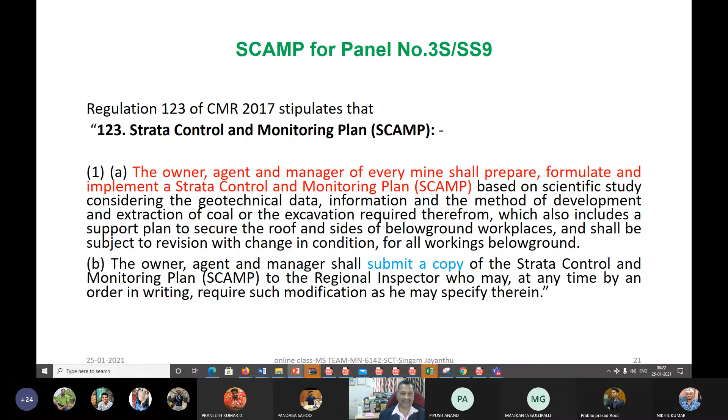We started discussing the previous topic on Strata Control and Monitoring Plan and its related latest issues of regulations 2017, which is 123 regulation. Those details are available everywhere, on Google. Some important points we tried to discuss in the previous classes, along with some case studies.

Now we are going ahead with a case study of a typical mine and its support designs, and then rock mass classifications - not only rock mass rating, but also rock mass quality. Today we will be discussing mostly on all these aspects.

Those who have prior knowledge from previous courses, as I gave emphasis on the total system, can also share their knowledge with others in our group, because we have a very good transdisciplinary group from civil engineering, mechanical engineering, maybe electrical, electronics, and so on. That's what we promote: transdisciplinary, translational, industry-oriented research, especially for Strata Control Technology, because only mining engineers cannot do the total research on that.

We need transdisciplinary research teams as part of National Educational Policy 2020. Now I kept the numbers as is, based on some draft report I have been preparing, so it is easy for anyone interested to learn more. They can also get a lot of data from the mines, and I can introduce the mine people, who will know what happened during the night shift, depending on their interest, from this KTK-5 mine.

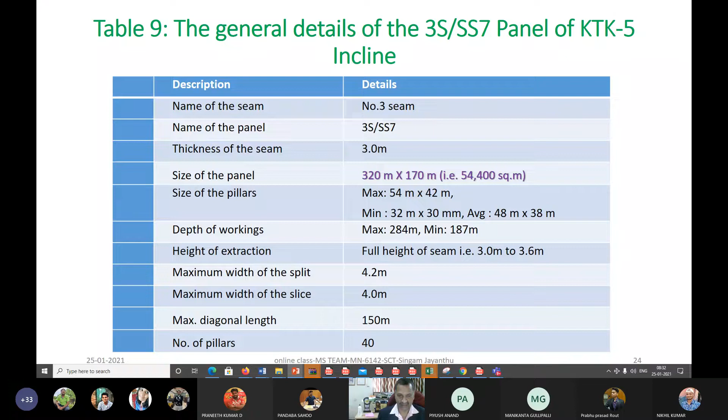These are some typical issues that my beloved students, as civil engineers, can understand better, and as mechanical engineers too. It is easy to estimate the deflection when there is more length and its moment of inertia, and based on its Young's modulus, modulus of rigidity - M by I is equal to F by Y is equal to E by R. That equation holds good, but it is not truly 100% right for our rock mechanics or rock masses. That may be very good for solid mechanics, which our mechanical engineers like Nikhil and others must be using.

Since we are using this for our support designs, rock mass rating and rock mass quality, I wanted to give a little time, because I don't want to explain the total methods of mining in this course or class. Of course, if somebody is interested, I can take you into the mines either through videos, photographs, or introduce you to the last night shift under manager of that mine to tell what happened there - depending on your interest, my beloved students.

So the method of extraction, as we have seen, is 4.2 meter wide and 3 meter height. That's what - each pillar is divided into 2 equal halves, and later in the apparent dip.

This is a simple point: when the inclination is more, instead of going into the direct dip direction or main dip direction, you will be having apparent dip. This apparent dip must be compared to the main dip. It is dipping like this, for example, here in this mine 1 in 2.5 or something like that. But when you have all those seams dipping like this, when you have a gallery along the strike, that is 0 degree dipping - it is a straight line, this is horizontal. When you have some apparent dip, that will have less gradient, which will facilitate our machinery and other things to move. That's why we follow apparent dip.

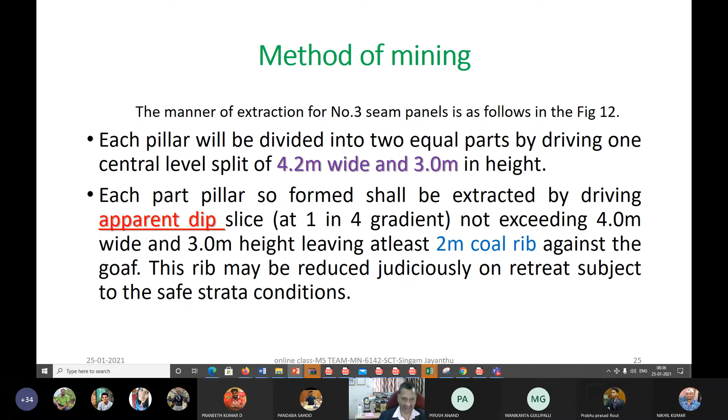About 3 meter along the floor level, when we extract during development, on retreat while coming return, that is when slices are made. So during that time, it can be heightened near the goaf. This is the way how it is extracted.

Either it can be done, if it is developed along the roof level, then it can be done by dinting it. When it is developed along the floor level, then it can be done by roof blasting. This is the way how we do it.

If the development is done in the roof level, then along the floor, that 0.6 meter coal will be there, that you will be extracting. But this dinting is more easy and more comfortable as far as strata control technology is concerned, because the reason is very simple, my beloved students of strata control technology, MN 6142.

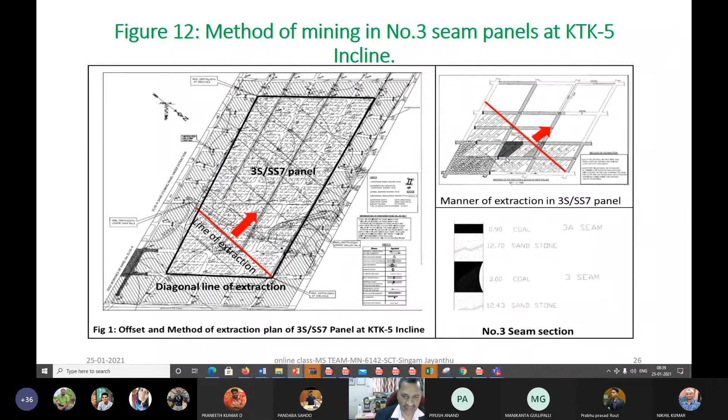These slices are made so that compared to this, the angle will be less in the apparent dip direction, as far as the workings are concerned, for maneuverability of your machines, LHD, SDL, like that. Here SDLs are used, and I am not going much into the method here, but later.

Generally when it is done, as far as this case study is concerned, it is supposed to protect the surface feature. That is also one part of your strata control technology that you are supposed to consider in designing any mining methods or strata control measures, because there is a surface to be protected with some state highways.

And high tension power lines. Okay, then driving off a new slice, of course, this is about the method, and later they used to stow it, right? And then at any time there should not be more than 2 slice voids left unstowed, because these examples.

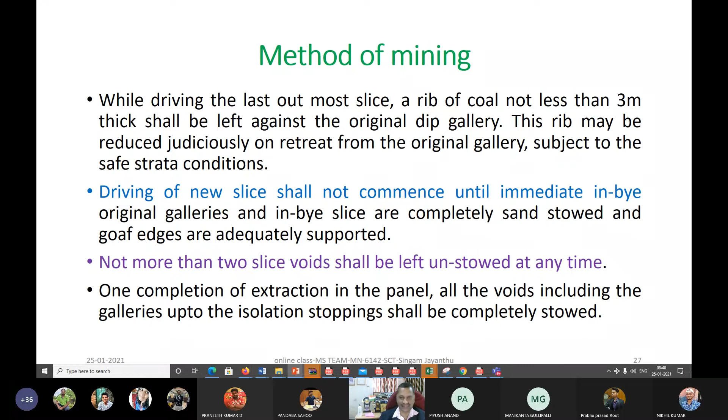These details I used to explain to my beloved students many times, where we have seen caving in a stowing panel, like I used to give some example of notorious examples when we used to conduct investigations in one of the typical Amlabad colliery, because these names I give, so that whenever you have time to see somewhere when you write, because this was a part of our CMRS investigations in 1989.

Right, '89, '90, you can say reports like that by our beloved friends Angad Kushwaha, Raghavendra Singh, Rajendra Singh, because these are the people with whom we used to go daily and then do that work, and under the leadership of our Dr. T.N. Singh Saab, with us for about 10 years, we were doing that. So these are the references. You can simply write their names, then you will get a lot of information. That is the reason why I give these names also, my beloved students of strata control technology.

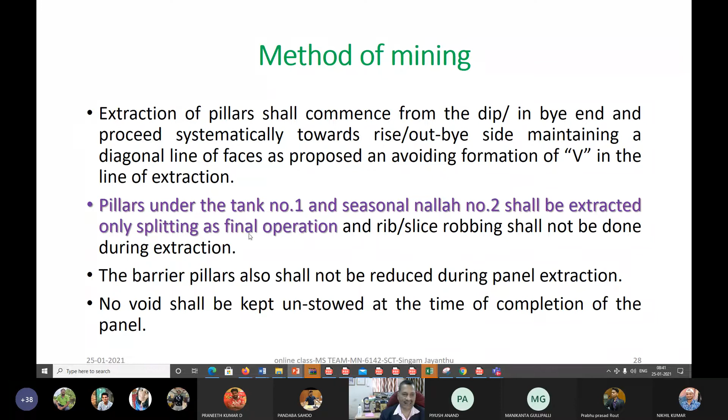Now, as a part of this method, there may be some seasonal nalas or so many things. That's why we are supposed to leave some protection pillars also somewhere. And this is our important point here.

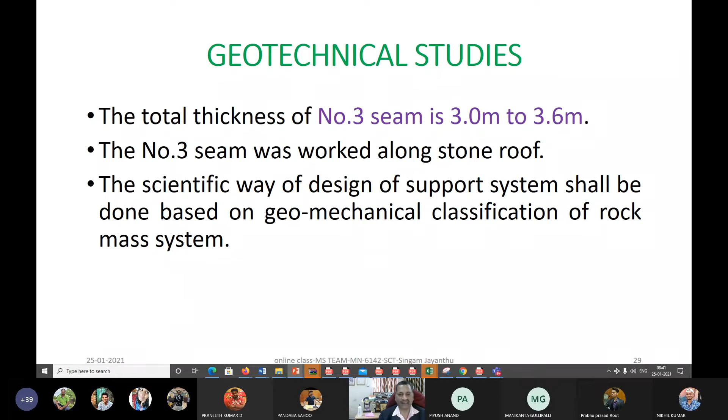These are the people involved in some of our investigations with international collaboration. So depending on your interest, I will discuss more and more, as I used to see an excellent interest by our Nikhil and group in learning more. That is more important, and I appreciate that. Once again, Nikhil, are you there, Nikhil?

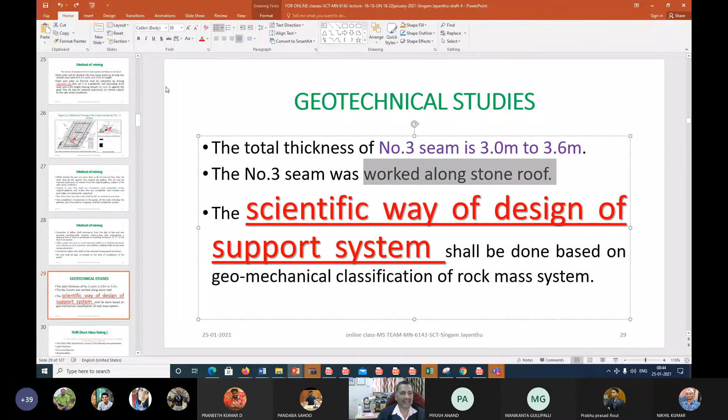This is very important, because if it had been worked along the floor, then there would have been 0.3 meters, or 0.6 meter might have been coal, and in the rock mass rating you might have attempted with 0.6 meter of coal in addition to 1.4 meter in the nether roof or immediate roof. That stone would have become your rock mass rating parameter, your classification to consider. But since this is a point, I kept it in blue color. You like it, right? I like it.

Okay, we all like it. Worked along the stone roof, so this will be the stone in the immediate roof, and for that you should design the support system. There is a scientific way of designing, and this will be done based on geomechanical classification, as you know very well. These classifications are your RMR as well as your Q. Both are used here, and why both are required?

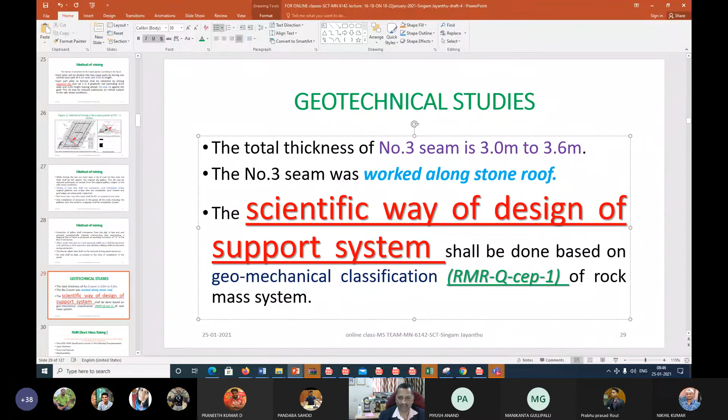Now this is a CEP question I am telling you: can't we have only one and do your business? But it is not sufficient, at least at the present level. You consider this as a CEP question, and I will be discussing based on your responses, my beloved students, why this rock mass rating and Q both are required. So here I think I should put this as a CEP question.

I will be writing here, CEP question 1: Why RMR and Q both are required for support design. So this is your CEP question, I have made it very clear to you. Now you think over it and we will be discussing, right? This is your CEP question, in red color, bold, underline, whatever you like. Okay, this is your CEP question.

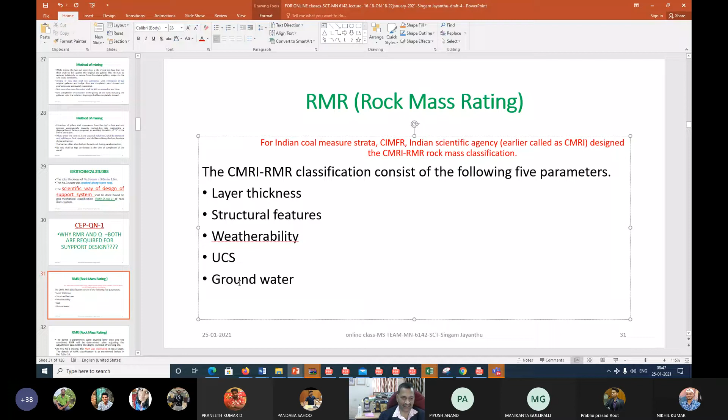Meanwhile, now we are going further. Here, rock mass rating - this we already discussed, so the parameters I am not going to explain further. We covered layer thickness, structural features, weatherability, compressive strength, uniaxial compressive strength, and groundwater. Here also, in this rating, we look at these 5 parameters.

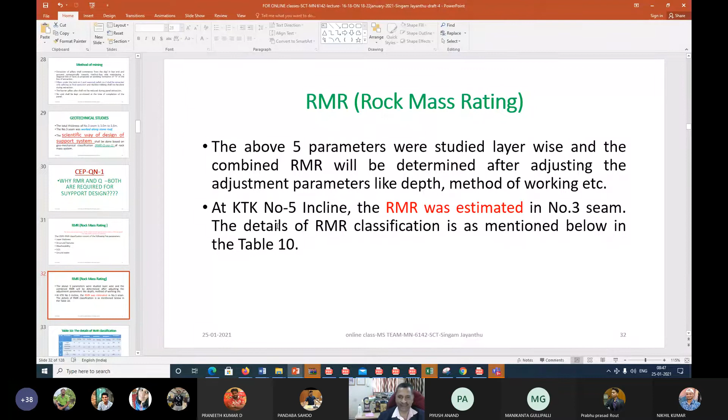This is from a typical mine, you need not consider the name as far as understanding the subject is concerned. Just leave out the name of the mine. In this typical mine, try to understand how this is estimated - the procedure we already discussed, so I am not going into that again.

Here are the details of this classification. That's why I kept this numbering - since I have been preparing this investigation report, I kept the same numbers so this becomes a reference for me and for anybody interested to learn and contribute to the present problems of our mining industry, as part of Atmanirbhar Bharat or Make in India, Skill India - like our Nikhil and others, they are coming up nicely.

Now here there are different layers, as you have seen - sandstone layer and another layer, another layer, another layer, where there is a value: 6 centimeter, 15 centimeter, 23 centimeter, 53, then 103. So around 1 meter overlying, its rating is 30, as far as layer thickness is concerned.

This itself shows, my beloved students, it is very simple to understand why it is 30 - the maximum rating given to that is 30. That means this is not having many layers in between, or there are no significant layers in between. That's why the full rating is given. That is the meaning as far as layer thickness is concerned.

And when you see it that way, here the layer thickness rating given is only 28. It has a similar analogy - you can understand why it is given less or more, as we have seen some examples already. I hope I showed you, otherwise you will get plenty of examples. Compared to other layers, you can easily understand there are very thin layers in the immediate one - that's why the rating of 11 is given, very less.

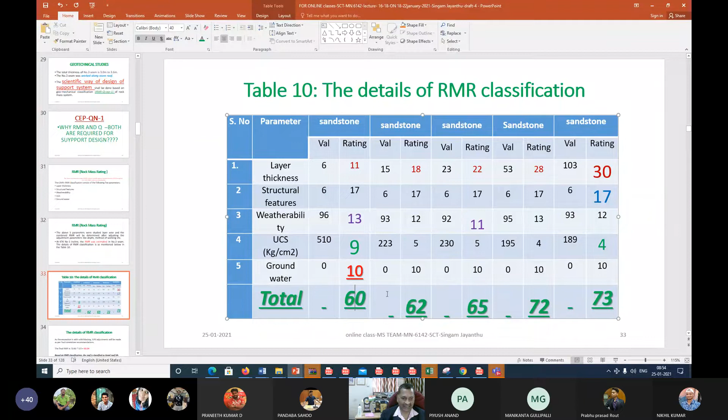So in that case, now you can see for the first layer, these are the total RMR for each and every layer. This is a very important point, my beloved students, to understand. Total is 60 for the first layer, for the second layer 62, for the third layer 65, for the fourth layer 72, and fifth layer 73. Now from there, we should go to the next step where you are designing the support.

And now you are supposed to do the adjustment of this rock mass rating, as discussed in the previous classes. If you have any doubts, definitely we will discuss.

Don't worry. I wish that before going to Republic Day, the day where we should feel more liberty to understand the issues, you should be liberal, right? You should not feel shy even asking any questions. That type of liberty you are having. On this Republic Day, all this knowledge should flow like river water. Those who are interested, like our Nikhil and others, who are very sincerely doing wonderful work on this transdisciplinary research, besides our mining and other BTech students, I appreciate them once again on this Republic Day in advance, that they are utilizing and making this knowledge available with improved skill India, useful for Make in India Atmanirbhar Bharat, of our President of CSIR, none other than Narendra Modi sir. These are very much required as a part of National Education Policy 2020, my beloved students.

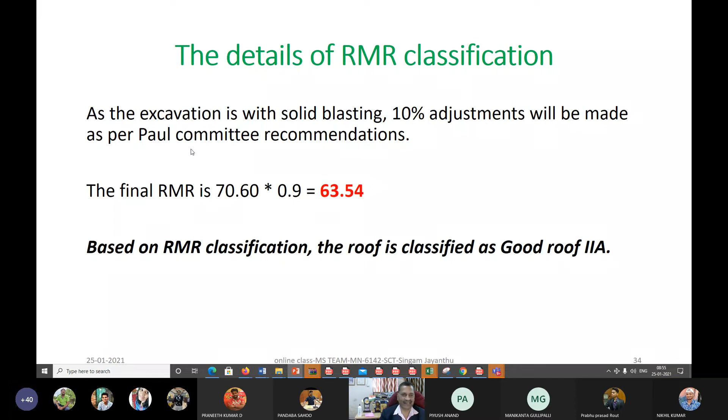As the excavation is with solid blasting, now you have to do the adjustments. Here we did a 10% adjustment, as per the Paul Committee recommendations, already told you at that time. So this was not very new, this is old wine in a new bottle, old juice in a new bottle, since 1988, as I used to tell you, my beloved students. Since 1988, we have been doing a lot of things, and more modifications are required. Those other issues definitely we'll be discussing.

But with these modifications, considering the condition that excavation is with solid blasting, now we have to reduce from the final RMR. How final RMR is reached, I need not explain, that is a weighted average of that thickness and RMR. And then it is reduced by 0.9, that is 10% reduction. So this rock mass rating will be 63.54. This is based on rock mass rating classification. The roof is classified as a good roof condition, 2A, as far as that thing is concerned.

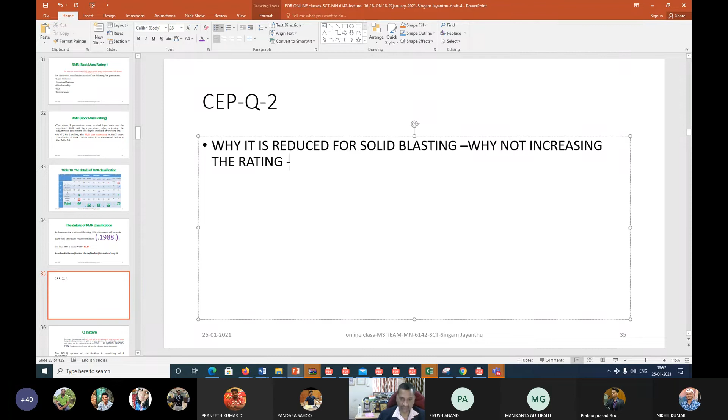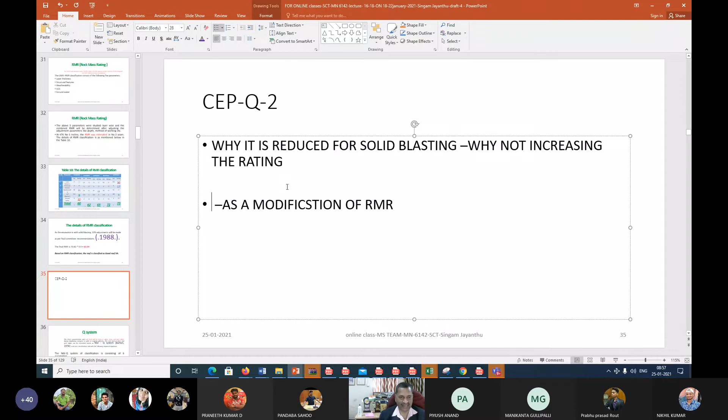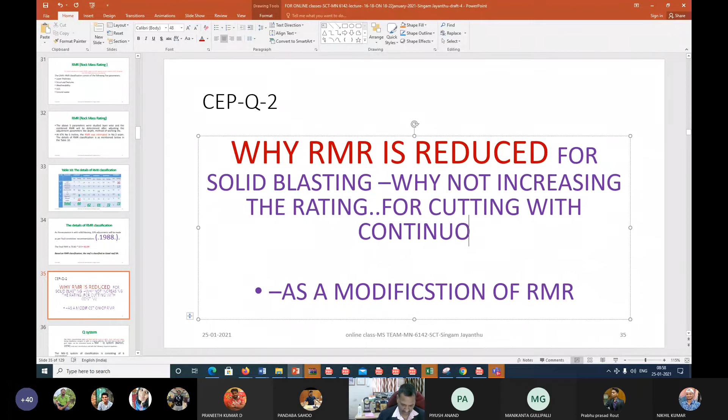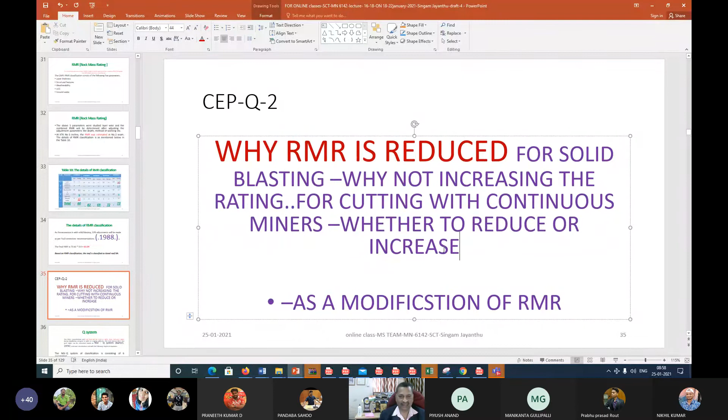But here now a very good CEP question for you, I hope you will really enjoy it. Why is it reduced for solid blasting? Why not increasing the rating as a modification of RMR? This is simple to understand, but we have already discussed many times, that's why I wish that even if it is not discussed before, it is easy for you to tell. So why is RMR reduced for solid blasting? For solid blasting, shall I reduce or increase, and if so, why? And it is not only that, for cutting with continuous miners, whether to reduce or increase?

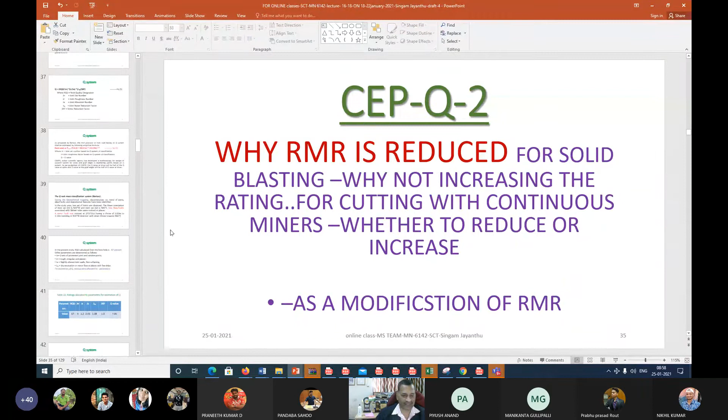So now continuing for my beloved students, this is a Q system that we want to go further, and other few details we have seen at that time based on the rock mass rating. Now we will be converting that into the load coming, and then to suit that load, how many number of supports, roof bolts, or whatever the support design. So once again I can show you, but already we discussed before, that's why I'm not discussing now, and I'm jumping into the rock mass classification Q system here.

So here, basically, you see stress concentration and rock load will generally be more as compared to your development workings. The development workings means, suppose this is a total panel with dips and rises, all the galleries like this, and that's why you made the pillars. This is an equal distribution of the stresses on the sides of the pillar. Some of the load is being taken by the pillars, right? But that is at the stage of development, that's why only rock mass rating is limited to that.

And already I told you, one of my beloved colleagues, scientists Angad Kushwaha, Raghavendra, Rajendra, all those people with whom we were working, they tried to even modify this rock mass rating, as I told you, and all the materials already I have given to you as part of the course material in the beginning of our semester. You must have gone through that. There also they tried to modify, including something more, some stress conditions based on the stress ratio of horizontal stress to vertical stress ratio and all those things. But still, I cannot say it can be widely applicable unless this comes as a part of any regulation or circular for the depillering design of support.

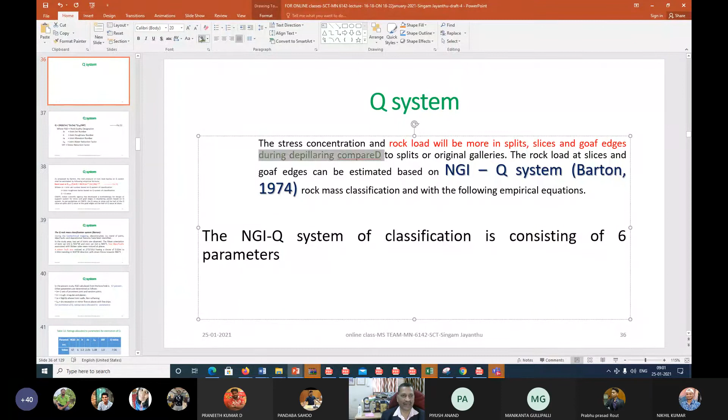Till that time, it will be more generally on the split slices and goaf edges during depillering compared to your development, as I tried to show you. That is the reason why now we are going a little bit further with some more details of this.

That is the reason why the rock load at slices and goaf edges can be estimated based on NGI Q system. Since long time, our beloved friend Nick Barton, Dr. Barton from Norway, in 1974, he started doing a lot of work on this too, but basically his work was limited to the tunnel supports with different geomechanic conditions, different stress regimes, stress situations of those tunnels, whether it is very deep or shallow, very hard rocks or soft rocks, squeezing ground conditions, and all those things were considered. So that's what he considered, these 6 parameters.

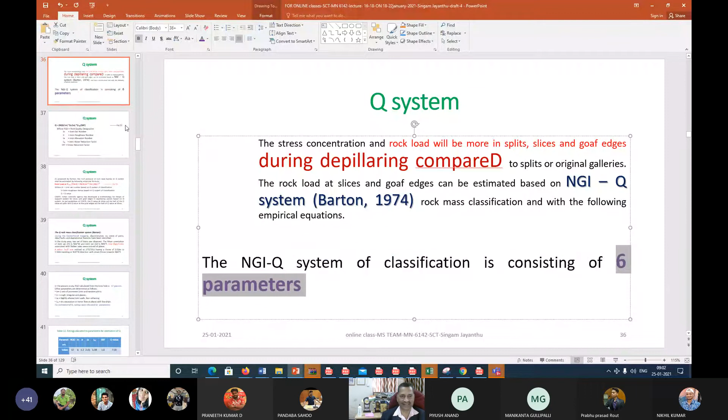The 6 parameters were considered as part of that classification. Of course, those details we will discuss later, but here these 6 parameters, you can see how this is, my beloved student, you should note down very clearly that this is all based on empirical formulations and trying to understand the physical situation. And nowadays, we are going with more applications of artificial intelligence, machine learning, artificial neural network, deep learning, algorithms, and so many things to analyze the data.

First is to generate the data through different types of investigations. That is a part you understand, and all those things we are supposed to give a lot of importance to. That's why I encourage you, my beloved next generation students, whether they are from any branch of engineering, biomedical, electrical, mechanical, or civil, they can give a lot of importance to understanding the field condition and then implementing, or after understanding that problem, only then can you think of its solution properly.

Otherwise, without understanding, it is something like castles in the air, like Vishwamitra built a Trishanku Swargam. It should not be like that, right? It should be the real situation that you should understand. That's why I give a lot of importance.

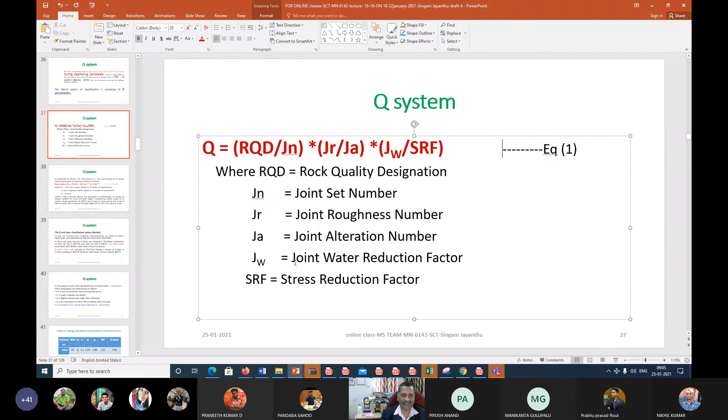This is very, very important. Before Republic Day, I am telling you, my beloved students, do not feel stressed to understand. It is a very simple point that we will be discussing, but only those who are very attentive can understand. Attentiveness is important, understanding the instruction is important, and responding promptly is important. That is the importance of our strata control technology, and only those people can be useful as part of our Skill India.

For that, how this emerged, let me show you once more the reasons for development of this Q system. Some case record background explaining and demonstrating the 6 parameters, with emphasis on stress strength problems, stress reduction factor relating to rock mass rating, and the quality of rock mass, and how to collect field data by Q histogram logging and other things, which we prepared in my presence. Our Dr. Nick Barton was preparing and sharing this in workshops long back in different forums, including when I was in the Ministry of Mines as a scientist along with him, and I have already told you many examples of our interactions.

The original motivation for developing this rock mass classification was to try to understand why different Norwegian hydropower caverns displayed widely different deformation magnitudes. That is, need is the mother of invention.

There is a need in terms of our beloved rock mechanics engineer or geologist, whatever. Our beloved Nick Barton, I am telling you on his behalf, from the materials which he used to share with us along with him when we were in different workshops. That's what I am trying to show you, my beloved friends and students of technology.

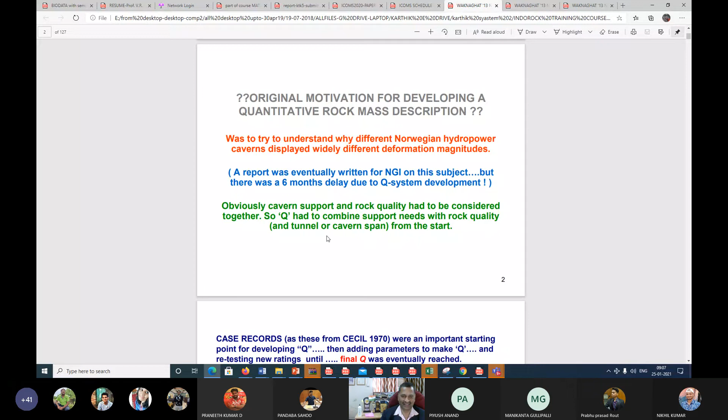Obviously, this cavern support, he started with tunnels and caverns, and rock quality had to be considered together. So Q had to combine support needs with rock quality, for tunnels and caverns from the start. This is the way how he started it.

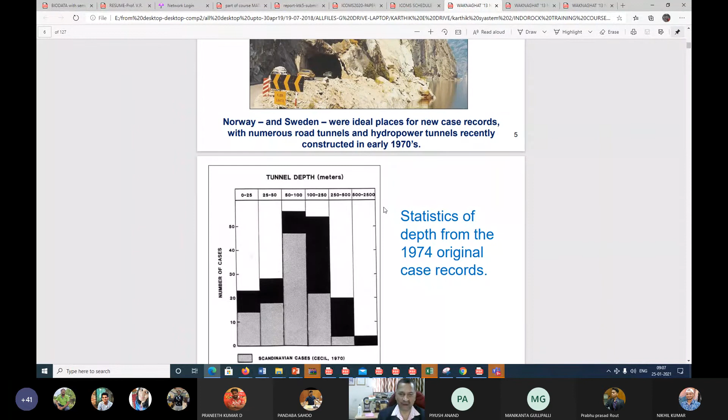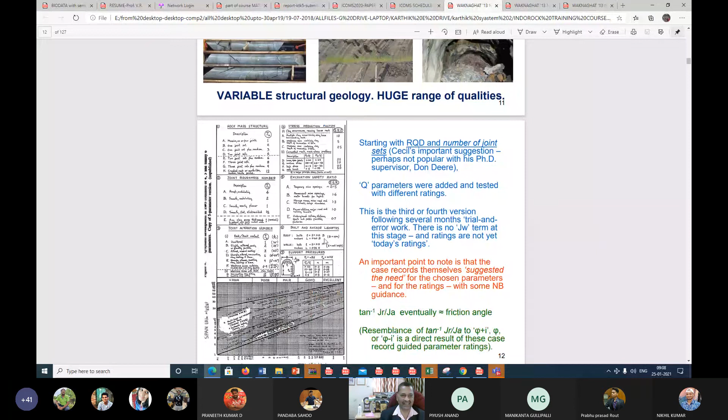These things I used to show in between, but details will be discussed later based on your interest and your response. I want you to be ready to be Arjun as a part of Skill India, Make India, Atmanirbhar Bharat, my beloved students of Strata Control Technology, MN 6142. This is the way how he explains nicely how this data is supposed to be considered, designed. This is the way he used to write in front of us. This is a paper on page, right.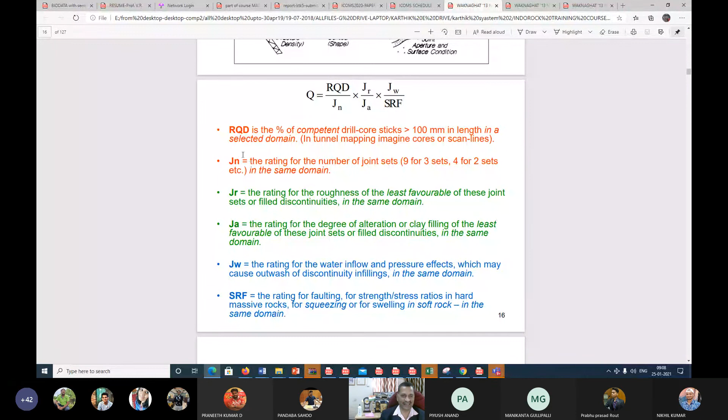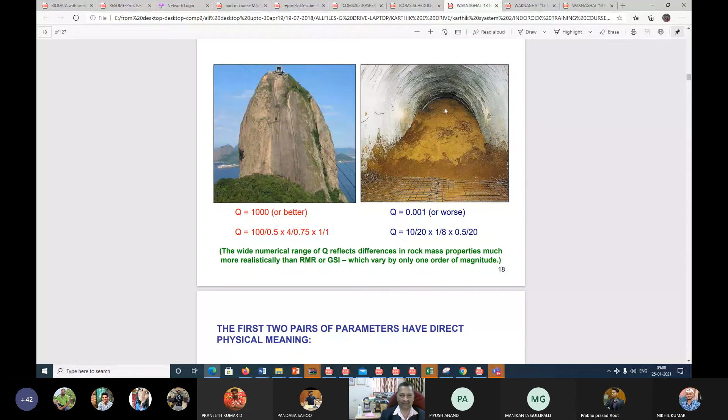Then different types of rocks, how it was classified, and different steps of RQD, JN, JR, JA, JW. J is not JNth here, J is some parameter given by him, SRF. Then different types of effects, you can see 1000, whatever is the rock quality, down to 0 or 0.001. The difference you can see is the quality of that rock. And then how these parameter readings are given.

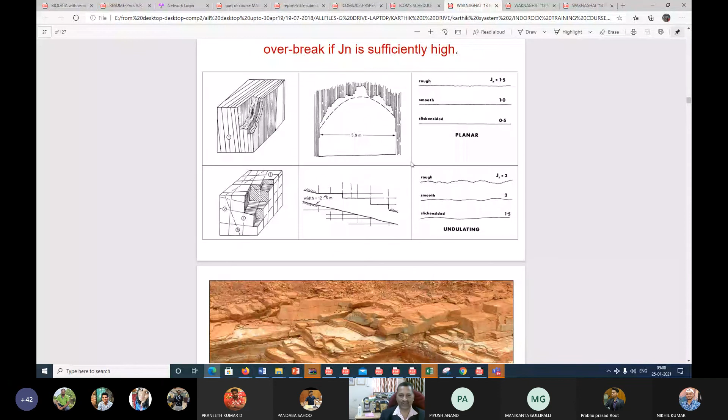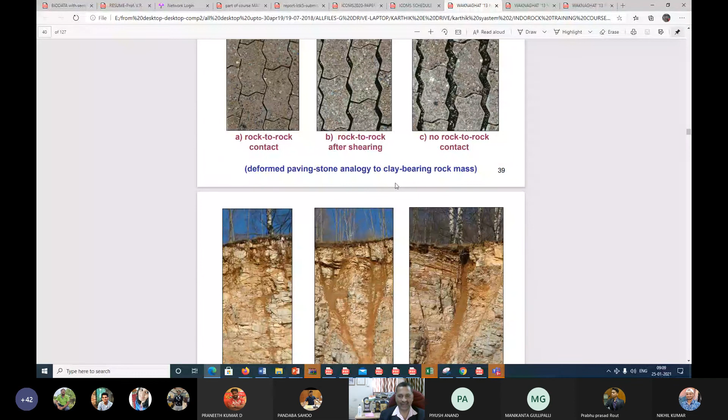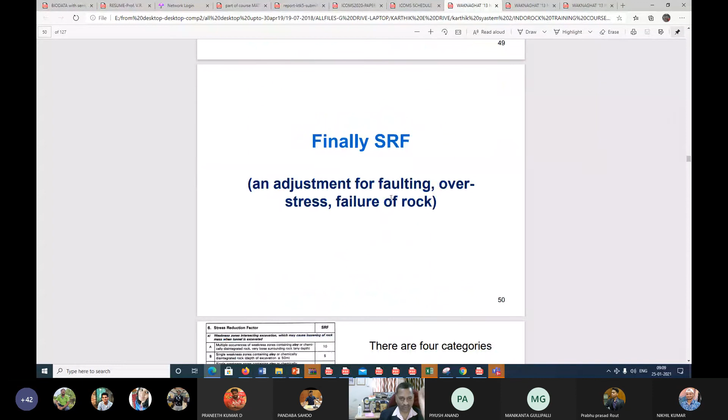First set, RQD, JN, this parameter, you will be seeing all those details, my beloved students. There are hundreds of slides and thousands of data I have, and this all depends on your interest, my beloved students. To learn the different parameters, how it is given, we'll be seeing that starting from parameter 1, 2, 3, 4, like JW water reduction ratios, or stress reduction factor, which is very important as far as our deep learning is concerned.

So now I should not give you stress, I should reduce the stress, relief techniques we should have, and stress should not be given to anybody. For that matter, you should have the source of stress reduction, but not stress creators. So now with this, I stop at this stage.

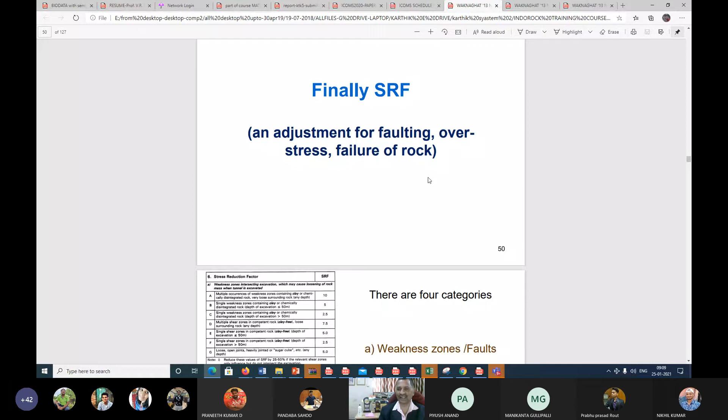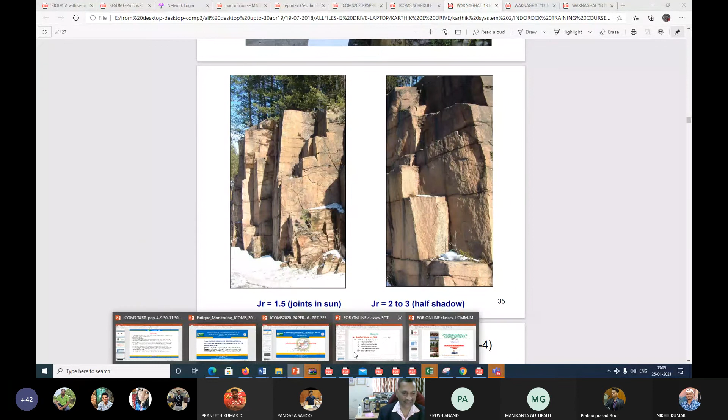Now we go for the CEP answers, and already you have, my beloved students, CEP questions with you. Now let me take up, you give your answers to the CEP questions now.

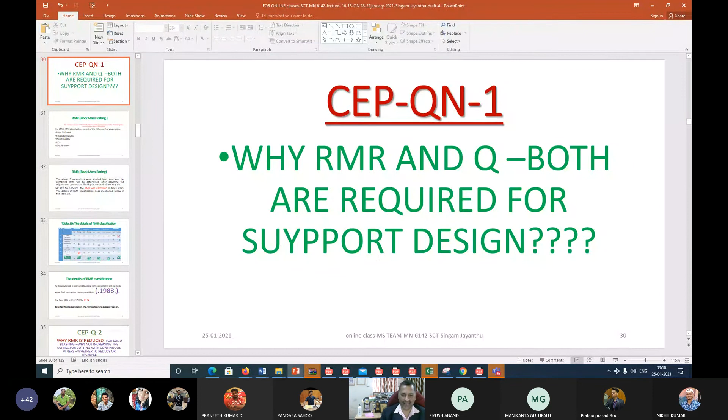Anybody can unmute, there is not much time. CEP question number 1: why are RMR and Q both required for support design as far as depillaring is concerned? Let me have an answer from our beloved students.

I am making it... yes, continue. Sir, Rohit Kumar, sir. Yes, very nice. Sir, RMR system is determined from geomechanics classification, sir, and the Q system includes RMR rating also, and the size of excavation or caving and the purpose of excavation, sir.

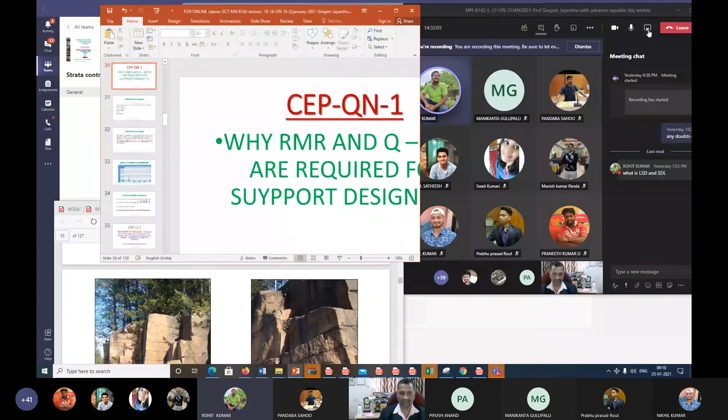Very good. Whatever, CEP question number 1. Acha, your name? Rohit. Sir, Rohit Kumar, sir. Rohit, very nice. CEP answer by Rohit. Anybody else? All these things are recorded and thousands of people are watching this.

I was very much delighted to get questions even from other countries, and they are working with us as international partners in different projects, present and future, including applications of artificial intelligence, machine learning, IoT, deep learning, and so many techniques on utilizing this data of strata control technology, what we generated till now over this limited experience of my 3.5 decades.

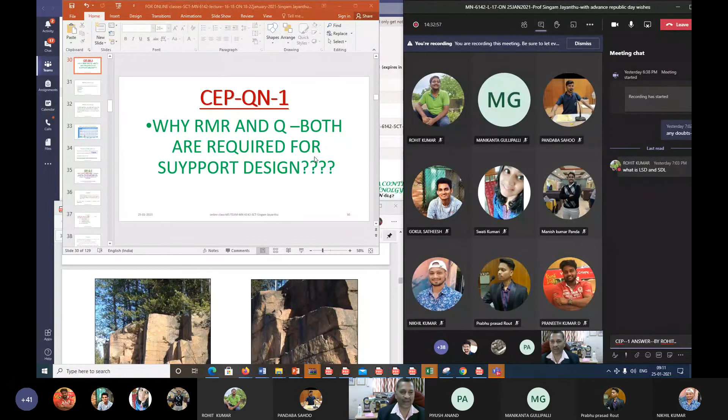Right, whatever next query was, CEP question 2: Why is RMR reduced for solid blasting? Why not increase the rating for cutting with continuous miners? Whether to reduce or increase?

Any answers? Any answers? If there is no answer, don't worry, my beloved students. Now I should not take more time, within 1 minute we should wind up. So CEP2 is zero, I will be discussing depending on your response.

This is a teaching learning process, not one-time or one-sided like your school where they don't know anything and ABC has to be learned by them. You are all experts in learning the language, you can understand the instruction, being in the final year and master students. So based on your response, our next interaction starts.

Right, so CEP question, it is zero. Then summary by whom? Summary by whom? So Gokul. Yes, continue, tell the name and continue. Gokul Satheesh, Gokul, yes, should not take more than 30 seconds.

Summary by Gokul: So we started to discuss about the strata control and monitoring plan of regulation 123, that we were discussing before, so we continued from that point and moved on to the general details of an example of the data we require for the process, and after that we moved on to the method of mining and the method of depillaring of those portions when there is some dip in the seam.

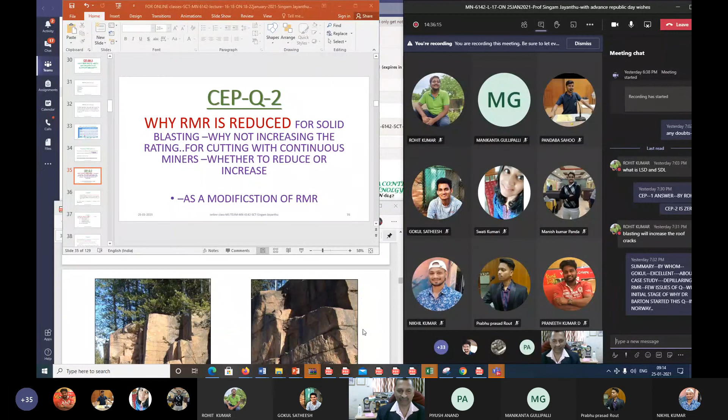They are really doing wonderful, excellent work for you, helping you and providing you all the facilities. Now you should understand, and even this integration of joint set number Jn and Jr, there are so many parameters, that's why I just kept everything open here. I hope you are seeing all this.

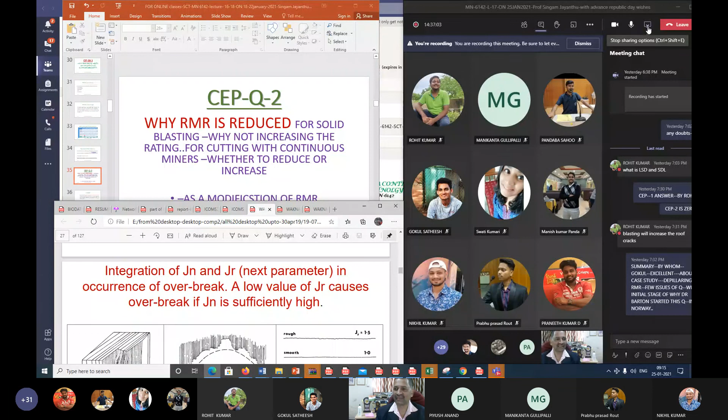And what should be said after that? After Jai Hind, Jai Bharat, because tomorrow is our Republic Day, we have to celebrate, my beloved students, so you should have that much josh to say Jai Hind in advance. So now Jai Hind, sir.